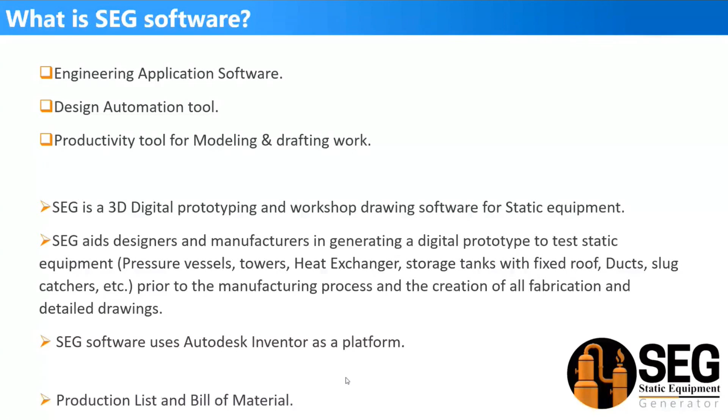You can generate the 3D model, fabrication drawings, a complete and detailed bill of material, sheet metal development, and many other things. SEG software is the only existing software that can generate vertical and horizontal pressure vessels, columns with different diameters and transitional sections with different thicknesses, storage tanks with fixed roof, shell and tube heat exchangers, equipment, piping, slug catcher, ducts, and spherical tanks. The only existing software that can do all of this under one umbrella.

By using another method, a pure CAD software like SolidWorks or Autodesk Inventor, we consumed around 25 hours to generate the 3D model, and around 10 hours to generate the fabrication drawings, totally around 35 or 38 hours to generate the complete 3D model and detailed drawings.

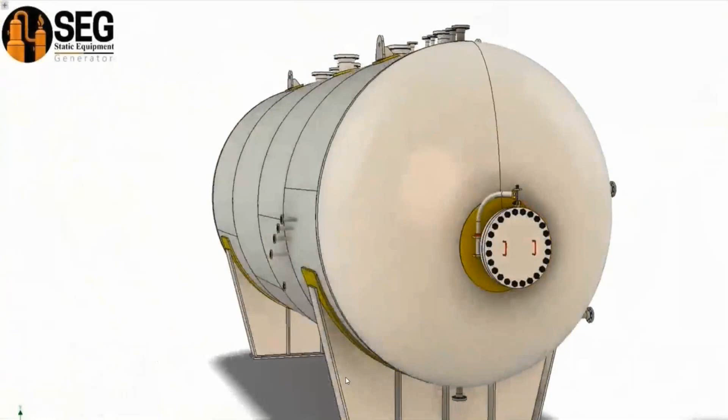By using SEG software, you can generate a 3D model and the detailed drawings. You can generate a complete and detailed bill of material. You can make the nozzle openings on the shell plates. You can get the sheet metal development for plates. You can export the 3D model in many different extensions. The same for the sheet metal development; you can export it in DXF or DWG extension. You can generate an estimated material cost report for your equipment to estimate the price of the materials required.

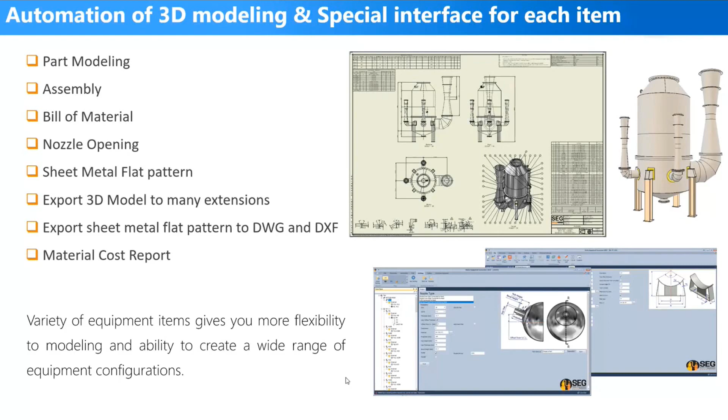Inshallah, in the next slides, we will discuss the available features for the storage tanks in SEG. Here we will not discuss the pressure vessels, columns or shell and tube heat exchangers. We will only discuss the available features for the storage tanks. In SEG software, we have a tool that gives you the ability to arrange the plates for the roof and bottom. And we will discuss the available features in this module during our presentation, inshallah.

By using SEG software, you will be able to generate different types and elements for the 3D model of the storage tank. You can add annular plates, bottom plates with different types, shell plates with different types, compression rings, anchor chairs, manways, cleanout doors according to the API, spiral stairs, drain sump, lifting lugs, and many other attachments.

For example, for the annular plate, you will find 3 different types. The first type is for equal annular plates, if you have a certain number of annular plates and they are identical. Another type, if you would like to define a separate thickness or a separate arc length for each annular plate, so you can control each annular plate separately. In that case, in SEG you can select the suitable type to define each annular plate separately.

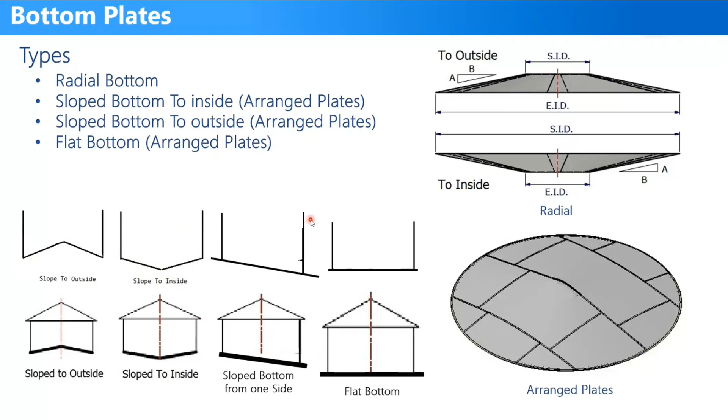Another option for the shell plates, like the same which we discussed on the annular plate. Here on the shell plates, SEG will give you the ability to select between 11 or more than 11 shell types. But for tanks, let's discuss 3 important types. The first type, which is shell from different pieces. Here, for this shell type, you can define the arc length for each plate inside the shell.

Most of us know that storage tanks are generated with diameters maybe more than 6 meters or something like that. So one sheet will not be enough to generate the complete shell course for this tank. So we need more than one plate to make the shell course. SEG gives you the ability to define the length of each plate separately. That's the first, but all of them with the same thickness.

Another type, which is shell from different pieces and thicknesses. This type will give you the ability to control the thickness of each plate on the shell. As we discussed, for the clean-out door, you may need to increase the thickness of the shell in this area. So you can make one sheet on this course with a different thickness for the clean-out door. So this type will give you the ability to control the arc length and the thickness for each plate. Okay.

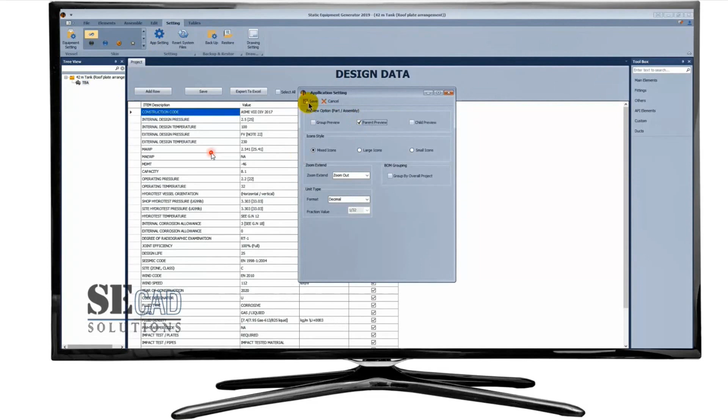Here in this video, we will generate a roof for a storage tank with 42 meters diameter. Okay, so from here, we will define the delivered plate dimensions. Okay, and we will add an arranged roof. And from here, we will define the top inside diameter and the thickness of the roof, the slope of the roof, and the bottom inside diameter.

From here, we will start arranging the roof plates, and in each row you will find an origin plate. This origin plate you can move to make it aligned to left, to right, or to center. You can control the offset of this origin plate. Many options you can do. The same for the rows. You can make them vertical and merge some rows, and that will give you flexibility to change the configuration of the plate arrangement. Okay, and we will discuss that inshallah during the demonstration.

Okay, after creating the arrangement, you can save it. After that, you can send the information to Autodesk Inventor to generate the 3D model. As you can see, the roof plate arrangements are created on Autodesk Inventor as separate parts.

Okay, so you can get a detail for each plate if you would like to make that, and get a detailed bill of material for this roof. Here, the plate arrangement, and for the bill of material, automatically you will get the details of plates and the weight of each plate.

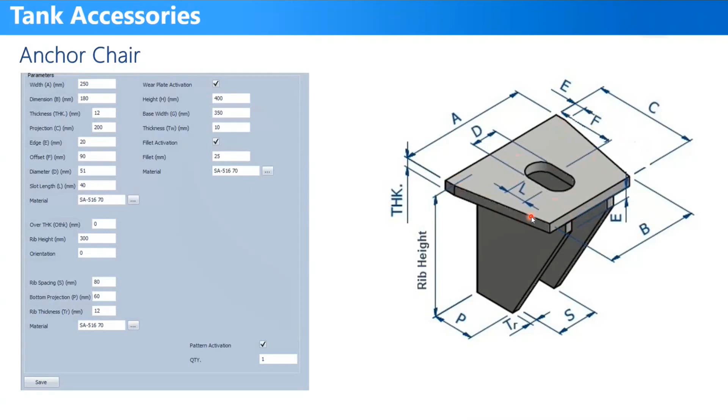Here for the cleanout doors, there are three different types of cover hinging. So you can select the suitable davit for the cleanout door. That's based on the size of the cleanout door. For the small sizes, you can use this type. For the mid sizes, you can use this type. For the large sizes, you can use this type of davit.

You can generate the spiral stairs for the storage tanks and multi-levels. Nozzles according to the API, so you can select the size of the nozzle as a nozzle from pipe or a nozzle from plate. So the neck of the nozzle can be generated from pipe or from plate. You can add a circular repad or a diamond repad. You can make it a low type as a circular or diamond repad.

And if you would like to control the dimensions of this nozzle, you can select the user-defined thicknesses, so you can control the dimensions to make it not equal the API dimensions. So here you will find the API dimensions appear here. So if you would like to change, just select user-defined thickness to change the thickness of elements.

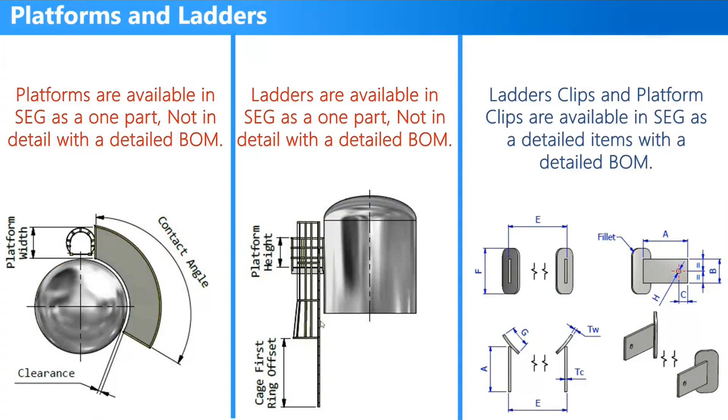You can make a nesting for the plates by using the Autodesk nesting tool, and that will give you the ability to save material because this tool will arrange the plates to give you the best cutting performance. Here in this video, we will make a nesting for the annular plates. So let's select the annular plates and generate a nesting study.

Okay. After that, we can define the available plate dimensions that we will use in nesting. Okay, the length and width for plates. After that, we will start the nesting study. Okay, here SEG will proceed to calculate the

required number of plates. If we come back here a little bit, you can see that the nesting efficiency is around 80%. So we will lose around 20% of the plates. And here the number of parts, we have 12 annular plates, and we will need 3 sheets for the annular plates. And you can see that's the arrangement of the annular plates for this assembly.

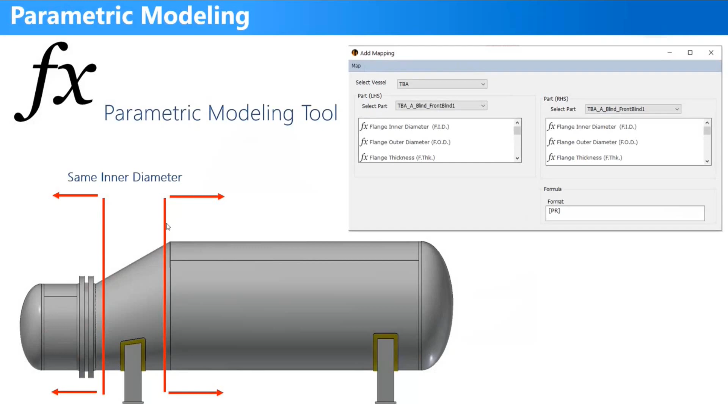Let's watch this video. Here we have two elements, shell and head. They have different inside diameters. By using the parameters relationship, we can make a mapping between the inside diameter of the head, and from the right hand side we select the shell and select the inside diameter of the shell, and make a relationship between them, so both of the inside diameters will be equal.

In case of changing one of them, let's change one of those inside diameters to 1.5 meters, for example, and click save. If you select the second item, automatically the inside diameter for the second item will be changed.

Let's repeat it for the thickness. Let's make a mapping for the thickness. Select the thickness of the head and the thickness of the shell, and make them equal. So in case of changing one of them, it will be reflected to the other. Click save. Now if you open the left head, you will get the inside diameter of the head changed.

So you can make a relationship between the connected items, okay, like that figure.

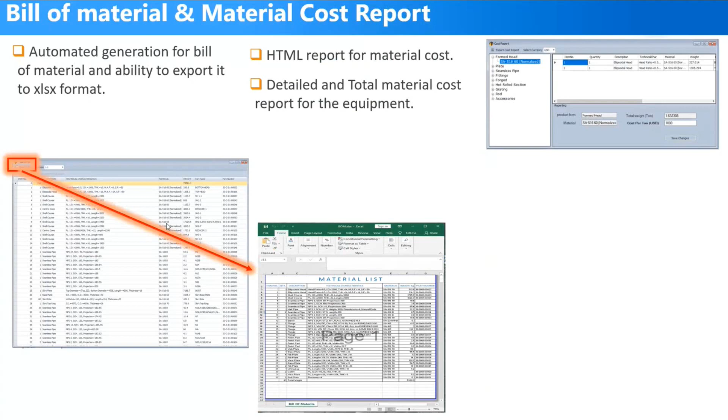You can export your bill of material. You will generate a detailed bill of material for your equipment, and you can export this bill of material in Excel format. So if any other department in your company, some of your colleagues, needs a bill of material in Excel format, you can send it to him to proceed with another process.

You can generate an estimated material cost report for your equipment. You can generate a nozzle opening by using a tool for this, used to generate the nozzle opening on the shell, and that will give you the ability to get the sheet metal development with the nozzle opening.

You can get sheet metal development for all plates in your project by using the flat pattern tool in SEG software.

You can export the 3D model in many different extensions to many different CAD software like CATIA, Pro Engineer, SolidWorks, AutoCAD, and many other applications.

You can export the sheet metal development to DWG extension and DXF extension. You can export your drawings to many different extensions.

For the drawings, you can make a general arrangement drawing for the equipment, make sub-assembly drawings for the attachments, and make detailed drawings for some nozzles or other attachments.

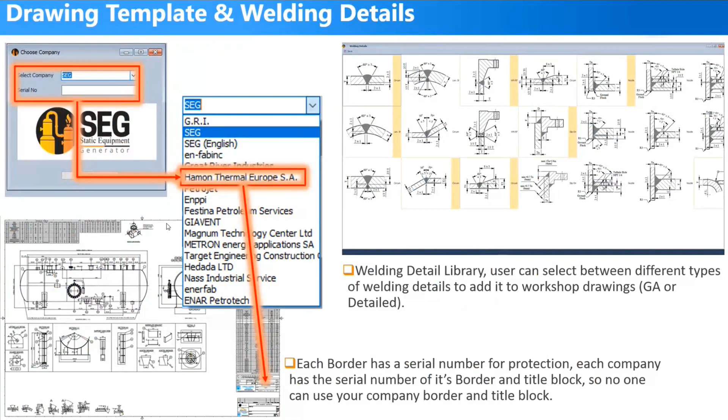Some of the available types of nozzles on shell: SEG includes more than 23 types of nozzles. Some of the famous types, like nozzle from pipe, where the neck of the nozzle will be formed or fabricated from pipe. Nozzle from plate, where the neck of this nozzle will be fabricated from a plate. Long weld neck nozzles, self-reinforcement long weld neck nozzles, forged hubs, forged hub with lips, rectangular opening, oval opening, and many other types of nozzles.

Some other types of supports available in SEG software. For example, for vessels and towers, you can use saddles, stacked saddles, tilted saddles for tilted vessels, skirt, support legs, lugs for vertical vessels, anchor chair for storage tanks, and support legs from standard hot rolled sections.

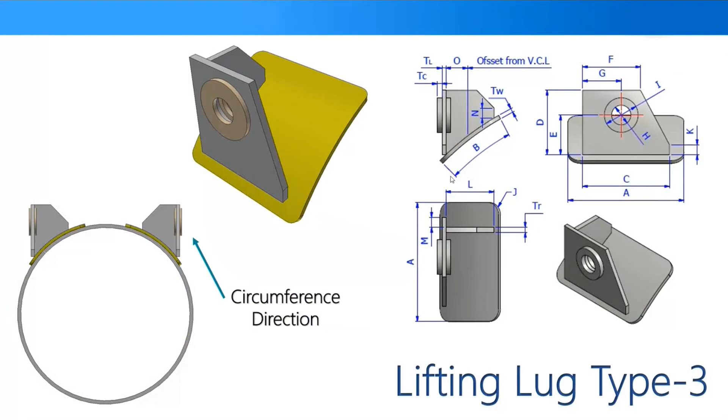Some other types of cradles for small vessels. Many different types of lifting lugs available in SEG suite for different positions of the vessel, like horizontal vessels, vertical vessels, small sizes, large sizes, like trunnion, and here different types of trunnion, different types of lifting lugs. Here are some other details for each type of lifting lugs. It's actually usable for vessels in most options.

Okay, now let's start generating our demo of today. Here's SEG software, and we will generate a new project. So from here, let's generate a new project.

That's the name of the project, demo, with today's date. Let's select the project location. So let's select the desktop, and from here you can select the module of the project. In our case, we can select the tank module. That module will give us the ability to make roof and bottom plates.

In case of using the overall module, it gives you the ability to generate tube sheets for heat exchangers. You can make spherical tank parts, piping, or ducts. So the overall module gives you all the features of the other modules. In our case, let's select the tank module, and by clicking on finish...

SEG will generate a project folder. This project here, you can figure that that's the SEG tree. The SEG tree includes different levels. The first level is the project level, where you can define the project information like project number, plant number, client, manufacturer, all of that.

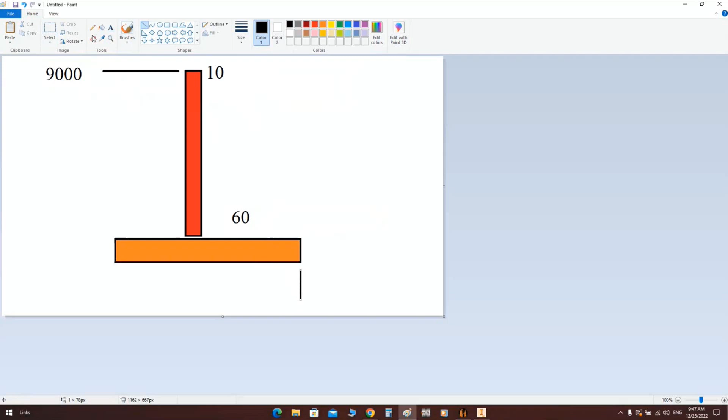And here we have the bottom plate, let's make it like that and change the color here. So we have 10 millimeters thickness here for the bottom plate. For the shell plate, we have 10 millimeters thickness, and here 60 millimeters projection for the bottom plate. So totally, the outside diameter of this bottom plate will be that value plus double that value and double that value, which is equal to 9140.

So let's repeat it here. Yeah, it's correct, 20 plus... so that's the outside diameter of the bottom.

Okay, so from here let's add the first part, which is flat bottom. You can figure that there are different types: sloped bottom. If we open the presentation again, for the available types for the bottom, you can figure that you can make it a flat bottom, tilted bottom, sloped to inside, or sloped to outside. In SEG, if you open the element API elements, you will find arranged sloped bottom with those three types: tilted, sloped to inside, and sloped to outside. In this case, let's add a flat bottom.

And for the bottom here, when you select this item, this form will appear, and we can define the bottom plate dimensions: the thickness of the bottom, the overlap, and the diameter of the bottom plate.

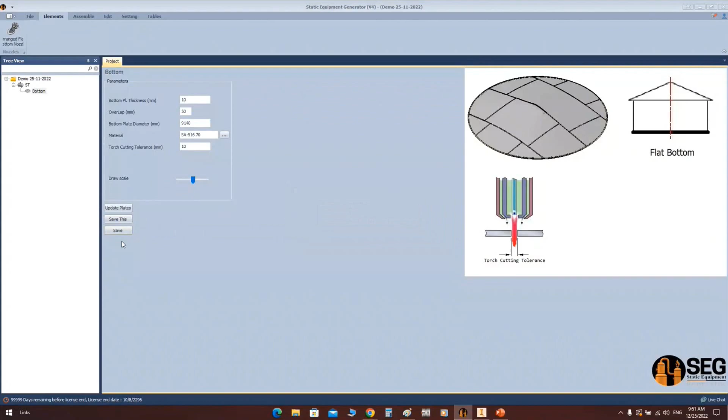Now let's select the scale of the next drawing, save this, and open the update. Here we have the plate, the bottom outside diameter, and on the next step we will make the arrangement of plates. Here you will find some options at the beginning before proceeding with plate arrangement, which will give you the ability to change the general configuration before going in deep.

Here, for example, let's select mid row - that means we will get a mid row here. Let's get a new one. If we have a plate like that, you can make a mid row here on the middle, so you will have a mid plate on the center of the roof. If you click on row, you will get a plate like that. Let's remove this one here.

I need to check the setting - sorry, we didn't save this value. Just one. Let's save that, come back here and open the plates. Change the scale - you can figure that if you open that, the scale is small. If you change that and click save, you can increase the scale. So if you click the mid row and row plates, you will get this configuration for the bottom.

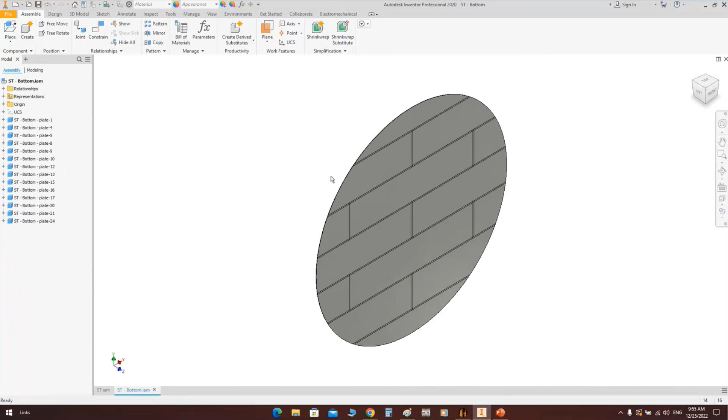But if you would like to make a rendering for elements during creation, we will select an option that gives us the ability to render the items during creation. Here we have the 3D model of the bottom, and if you take a look, you have the assembly from different parts. If we open that assembly, you can figure that you have the first element here - that's the first plate as a separate plate, then another plate. So each part is created separately, and you can make a nesting or a detail for that one.

Let's select the option of rendering elements during creation. From setting and app setting, let's select child preview and parent preview, and click save. And from here, let's select a shell element. Let's add panel.

Now you have generated the bottom plate model in Autodesk Inventor. Now we see the whole bottom plate with all the bottom plates, sketch plates, full plates. Okay, and now how easily can I generate the detailed drawing? In the detailed drawing, each part will be marked with a mark number and give the details of the length, width. Is that also a simple method, like how you generated this bottom plate?

Okay, we will discuss that during the demonstration, inshallah. After generating the 3D model, we will proceed by making a detailed drawing for the bottom, a general arrangement drawing, and how we can import the bill of material for each element. We will make a separate drawing for the bottom with a detailed bill of material in the drawing, and how we can reflect the item number for each item on Autodesk Inventor. We will discuss that, inshallah, during the session.

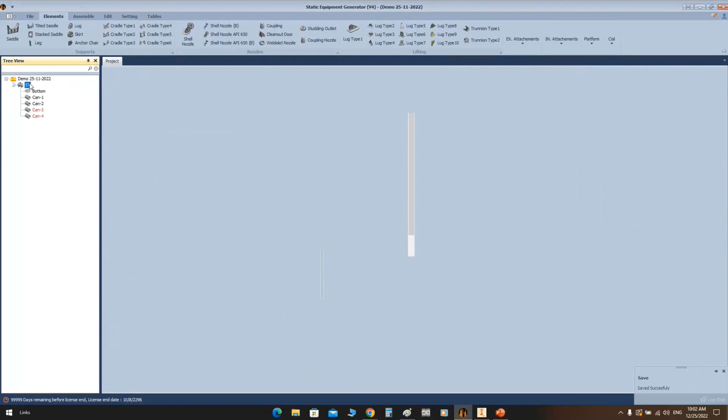Let's add another 2 shell courses, CAN 3, and let's make it look like CAN 1, another CAN, which is CAN 4. It looks like CAN 2, and click on save. And for CAN 3, let's change the thickness. Let's make it 8 millimeters and click update, click save. And for that one, we will keep everything as it is. Now let's start the assembly.

The third CAN, the last CAN.

Okay, now let's add a compression ring. So from here, let's select the equipment, and from elements, let's select the compression ring. Here from the compression ring, let's select detail B. You will find different types of details, based on the API. So let's select detail B, and from here, let's define the bend diameter.

So let's check that here. If that's the top can, we have inside diameter here and 8 millimeter thickness. So the bend radius here, which is that line, will be, so that's the bend radius of the angle. So from here, let's define the bend radius, and the offset of this angle here, the offset from the facing of the angle from the end of the shell.

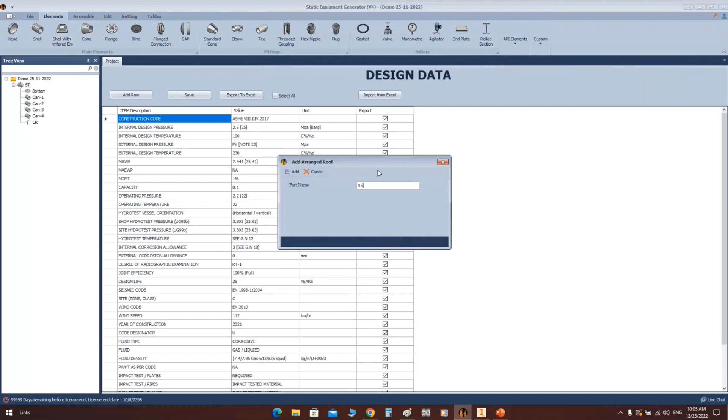Now let's generate the roof. From here and from elements, let's select arranged roof. Okay. And for the roof, let's define the opening here. Define the thickness of the roof to be 8 millimeters, the slope of the roof 1.5, the overlap and the end inside diameter. Okay, here we have an equal angle, like that.

Okay. And the roof will be here like that. So the offset from that line, so let's select another line with another color. So the diameter here, let's say we have 40 millimeters on each side. So that value will be increased by 80 millimeters. Okay, so the inside diameter, or the diameter of the roof, will be like that. And that's the torch cut tolerance. Change the scale and click on save.

Now let's open the plate arrangement for the roof. And from here, let's click draw plates. So we will get this arrangement as a default. You can change the plate arrangement if you would like. And here we will discuss another option. Let's reset the grid. Let's make all centered.

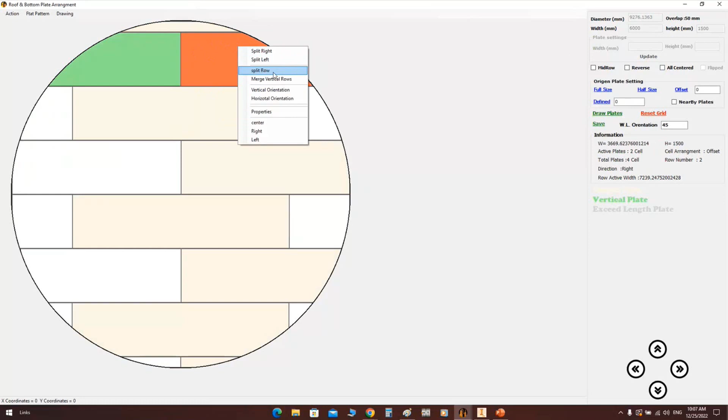So we merge those rows, and from here we can change the origin plate. As you can see, the origin plate takes orange or brown color. So let's make it on the right like that, and make a split to the right. So we will get two plates here, and make another split here. So we have 4 plates. So we can define each plate width here.

So let's define the width of the origin plate to 1.5 meters, like that, and the same for that one, 1.5 meters. So we have those other plates here like that. The same thing we will do here.

Let's flip the orientation of those rows to make them vertical, and let's merge those rows. And from here, let's make it half plate and define the width of this bottom plate like that. And you can add two other plates here and there, and define that one to be 1.5 meters and that one 1.8. So you can control the arrangement of plates that way.

You can make an offset. For example, let's make it offset by half a meter. So you can make the welding line offset like that, and you can make it centered. You can make it full size, sorry.

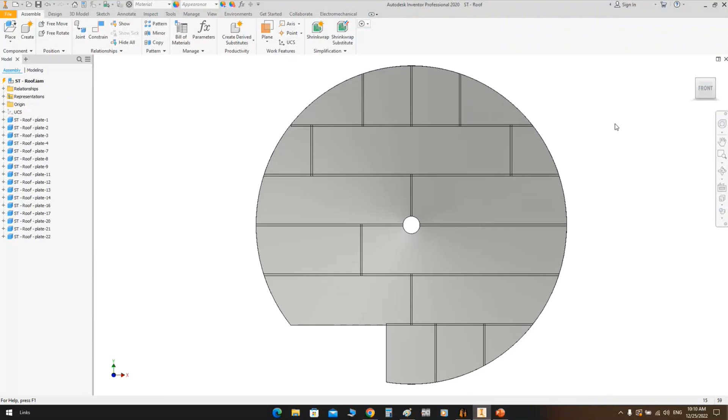Okay, now the assembly of the roof is done, and it will be automatically assembled with the tank assembly. Here we have the tank, bottom, shell courses, and roof.

Now let's add some attachments here. Let's add a cover for the roof. So from here, let's define the thickness of the plate, the overlap, and the length. Let's add a cover, top cover plate, millimeters. The longitudinal welding line orientation, let's make it 45. Save, and click on Start Assembly.

Now, after generating this item, we will make the anchor chair, make a cleanout door and some other nozzles, make a spiral stair, a platform with ladder, and some nozzles with internal piping and external piping.

Okay, from here, let's select the first can. We will add anchor chair here. Okay, so let's select the first can. Okay, and from elements, let's add anchor chair. So from here, let's select.

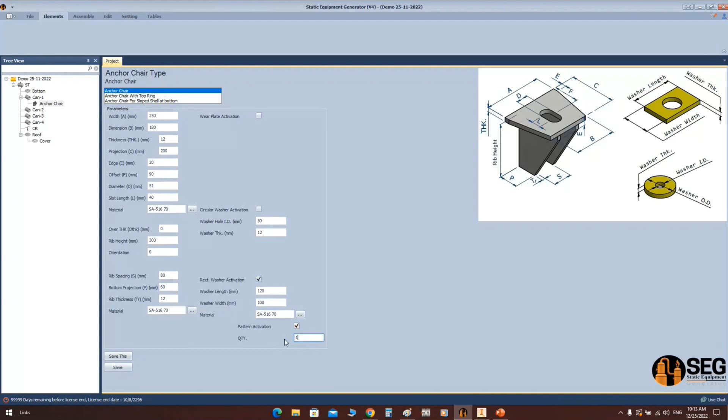And here for the orientation, let's calculate the orientation for 12 chairs, which will be 15 degrees. So let's add 15 degrees and click on Save. Now let's click Start to generate the anchor chairs.

Okay, here we have the front view and the welding line at 0 degrees, and here we have the anchor chairs. If we take a look at one of them like that, that's the anchor chair. Okay, now let's add a cleanout door.

So from here, let's select the first can, and from elements and from nozzles, let's select cleanout door. And if you select the cleanout door node from SEG, you will get this list. And each type of those has a different manway davit or cleanout door davit.

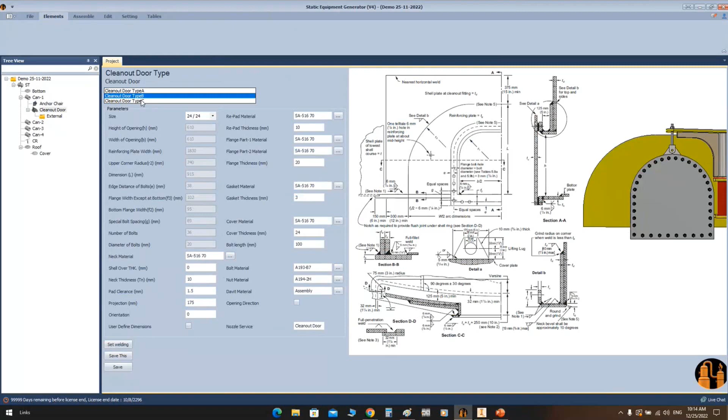Here for type A with small davit for small sizes. A cleanout door with that configuration. Another type of cleanout door. Those types which we discussed here. Okay, let's select type A. And from here you can select the size 8 by 16, 24 by 24. Let's select 24 by 24.

And if you would like to make a change to the API dimensions, you can select user-defined dimensions, and from here you will be able to change the dimensions of the API. But let's keep them as they are.

From here, if you have this cleanout door on a different shell course, okay, you have a shell with, let's say, a thickness greater than the other plates. So you will define the difference between the shell courses here in that value.

For the orientation, let's define the orientation as 30 degrees. Okay, and here's the materials, and let's click on save. And now let's click on start assembly to generate the cleanout door.

Here's the neck plate of the cleanout door. The repad, flange first part, flange second part, the gasket, the cover,

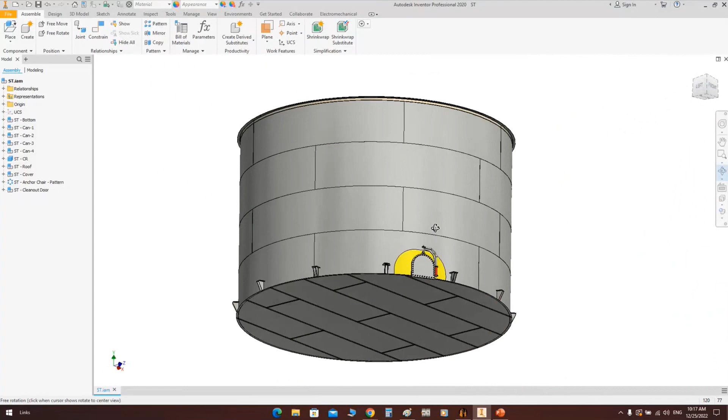Okay, now we have the cleanout door. Now let's add some other nozzles on this tank. Okay, so let's select the last can. And from here, let's select elements, and let's add another nozzle. Let's add nozzle 1. And for the nozzle 1, let's select a nozzle from pipe.

You can figure that you have a large list of nozzles with the different types, as we discussed in this slide. You will find a nozzle from pipe, nozzle from plate, long weld neck nozzle, more than 23 types of nozzles. Let's add a nozzle from plate and select the size as 10 inches. Sorry, this nozzle is according to ASME.

So let's delete it and add another nozzle according to the API. So you will be able to add a diamond pad and circular pad. So from here, let's add a shell nozzle according to API. So that's one. From here, let's select nozzle from pipe, select the size and select diamond pad. And from here, let's select the schedule of this pipe and define the location. Define the orientation.

And for the projection from the outside diameter of the vessel, let's define that after adding a flange. So let's add a flange here. Okay. And select welding neck raised face according to ASME B16.5. Rating, let's keep it 150. Select the size of the flange and the same schedule of the pipe.

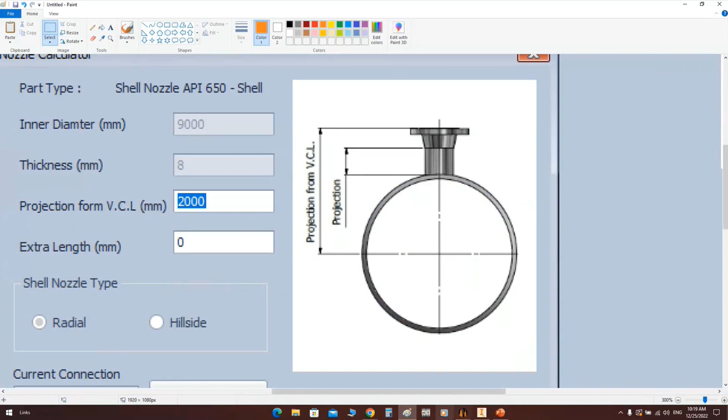Okay. And if we come back to the nozzle again, from the calculator, you can calculate the projection of the nozzle. If you take a look at the image here, by defining the projection from the tank center line to the facing of the flange, SEG automatically will calculate the required projection of the pipe. So let's make a new page.

Some points here. We have this circle, which is the diameter of the tank, and that's the center line. And we need to make a nozzle projection here. So the outside diameter here will be divided by 2. So that's the outside radius at that point. And we need to make a projection over that value with, let's say, 200 millimeters.

Okay. So the projection from center line, if we calculate it, that's the projection to the facing of the flange. So let's make it 4 meters 750. So if we come back here, 4 meters 750, and click calculate. So SEG will calculate automatically the projection of the pipe here, which is 140, and it will be reflected to the projection on that form here.

Another option for the set weld, here SEG detected that you have a repad and a pipe. So you have an option here to select a single V weld or a double V weld. So let's select a single V, and you can add a clad on the parent element or parent and nozzle, or you can make it without clad.

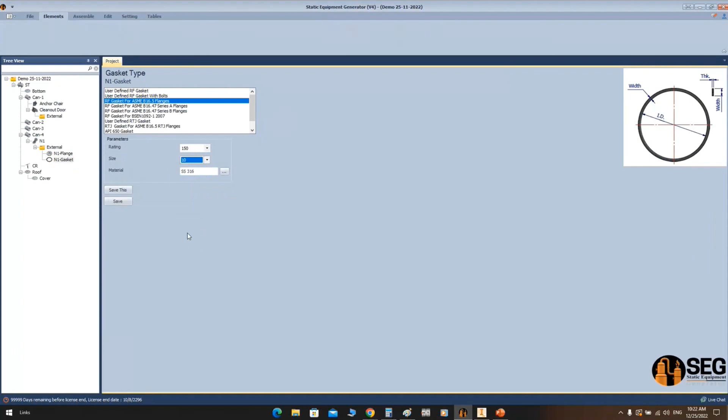Okay, so to make a piping from the external connection of this nozzle, let's add some other items after this flange. So from here, let's add N1. Okay, so let's select according to ASME, select the size of the gasket. Let's add another flange. And let's make it look like N1 flange, but we will flip the facing of this flange, like that.

Let's add a pipe, N1, and define the size of this pipe to be 10 inches with schedule 40, with a length of, let's say, 1 meter and 50 millimeters right now, and click save. Let's add an elbow, N1 elbow, like that. Let's make it a long radius elbow, 10 inches. Select schedule 40, and click on save. Now let's create those items. They will be connected to this flange.

So if you take a look here, after finishing I will show you that. We have connected piping to this nozzle here like that. We have another flange connected here, another pipe and elbow. And if you would like to flip the orientation of this elbow to make the connected pipe go below, we can change the orientation of this elbow, make it 180 degrees, and let's add another pipe, N1 2, make it look like N1 pipe 1, and let's change the length.

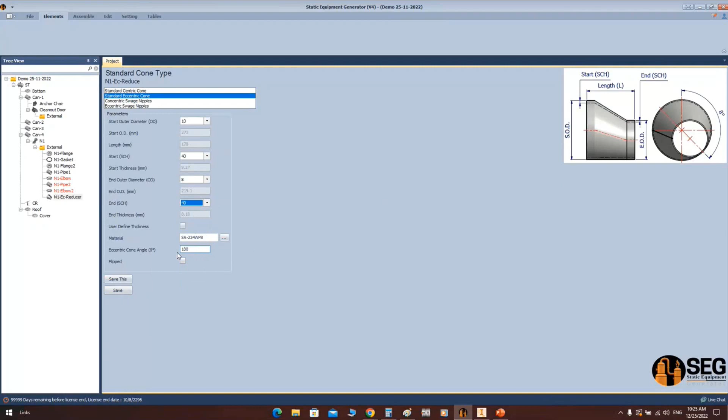Okay. And let's add another elbow, and make the orientation at 0. And let's add a reducer, N1 reducer. And from here, let's select eccentric reducer, select the size which is 10 inches with schedule 40, and it will be 10 by 8, and the schedule here will be 40, and the eccentric cone angle will be 180 degrees, and click on save.

Now let's click on start assembly. So the first thing, the elbow orientation will be changed. Okay, so you can figure that it comes below. We have a pipe, another elbow. After that, we have the eccentric reducer.

Okay, so you have an external piping connection here on this nozzle. Now let's add another nozzle to the roof with internal projection. So here we discussed the nozzles with external projection and how we can make a piping for the external projection.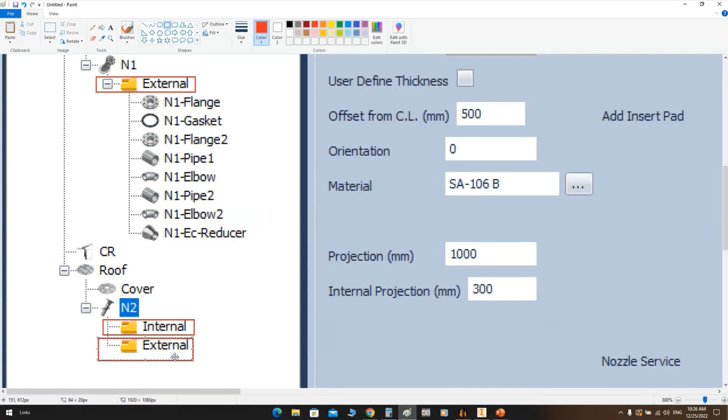Now let's select the roof, and from elements, let's add a nozzle with internal projection and external projection. So let's add N2. You can figure that in N2 you have internal connection and external connection. For N1 we have external connection only, but for N2 we have internal and external connection. That type of nozzle gives you the ability to make internal piping and external piping. You can connect elements to the inlet of the nozzle and outlet of the nozzle.

So from here, let's select the size of this nozzle, make it a 4 inch nozzle with schedule 40, and add a repad, offset from vessel center line, and the orientation 190 degrees, and the projection from the weld line here. So let's make it millimeters, and the internal projection, let's make it half a meter.

Click on save, and for the external, let's add a flange, flange 1, and let's make it a slip-on flange according to ASME. Select the same size of the pipe, the offset of the nozzle from the pipe, and click on save. Now for the internal, let's select the internal node, and from here let's add another flange, flange 2, and make it slip-on, 4 inches, millimeters.

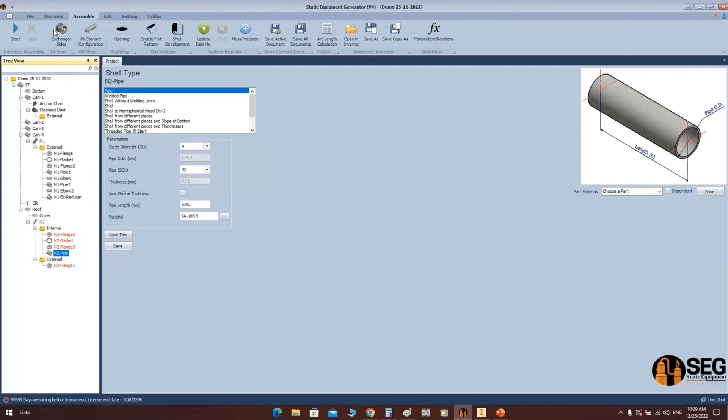5 meters, click save. And let's take a half section here on the tank like that to check the nozzle during creation. Okay, so let's click on Start Assembly. Here the roof nozzle will be generated with a repad.

Okay, so you can figure that this nozzle has internal and external projection. Now we have this nozzle with internal projection like that. We have 2 slip-on flanges here and a connection point at the end here. If you would like to make another piping here to another place, you can make it the same way we did minutes ago for this nozzle.

Now let's add a spiral stair on this storage tank. So from here, let's select can 1, and from elements, let's select external attachment. You can figure that you have a large list of external attachments like a nameplate, external repads, top davit for columns, grounding lugs, earthing bosses, fireproofing clips, external stiffening, nozzle ribs, many other attachments here. One of them is the spiral stair.

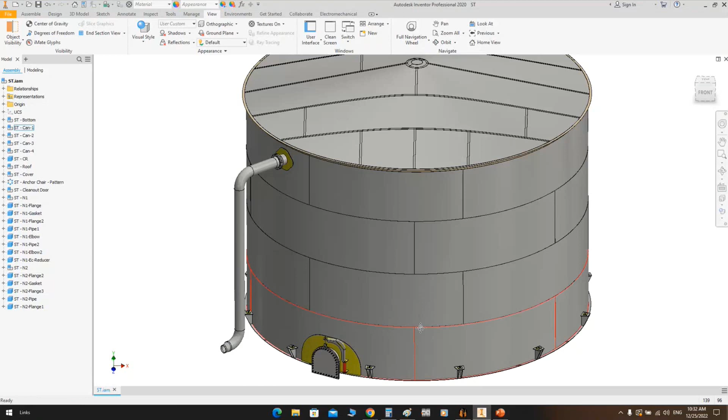The offset from the base, keep it at 0, stair inside width, which is the spacing between the internal stringer and the external stringer. The stair direction, we will make it counterclockwise. So if you take a look here, the stair will start at 0. If you take a look from the top here, if you would like to make it in that direction, let's make a print screen here.

If you would like to make the stair start in that direction, that's clockwise, but in our case we will make it on the other direction, counterclockwise. So from here we will define it as counterclockwise, and here the step width, the step thickness, the step rise, and the channel size.

We will keep all dimensions as default. Here we will make a cut on the rails at the end of the stair, so we will cut the rails to the first post. It's not connected to another platform, so you will not select that one. Select this checkbox as a closed platform end.

From here you can select the size of the post on the platform, define the number of posts on the spiral stair, 6 posts and 2 posts for that one, platform angle 12 degrees, and here for the rails dimensions, all of that.

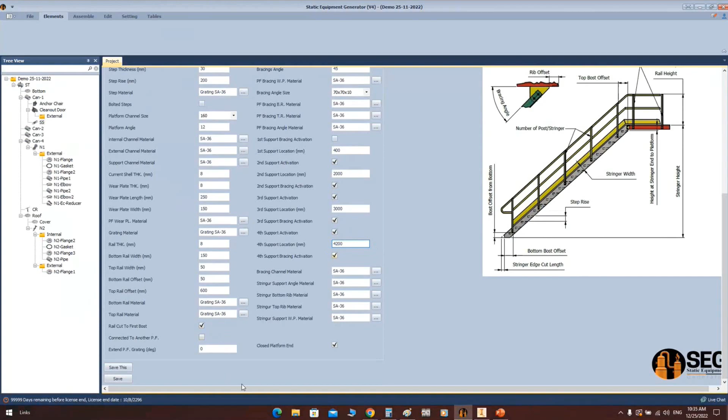Let's make it like that, and let's add the last one like that, and let's click on save. Okay, I think that's okay, and click on save.

Now we fill the dimensions of the spiral stair, and now we will start creating that element. You can see that each element will be generated and assembled on the spiral stair assembly.

This model includes around, I think, more than 30 elements, so it will take some time to generate it, around a minute and a half or 2 minutes to generate the complete 3D model for the spiral stair.

Here's the steps and the platform.

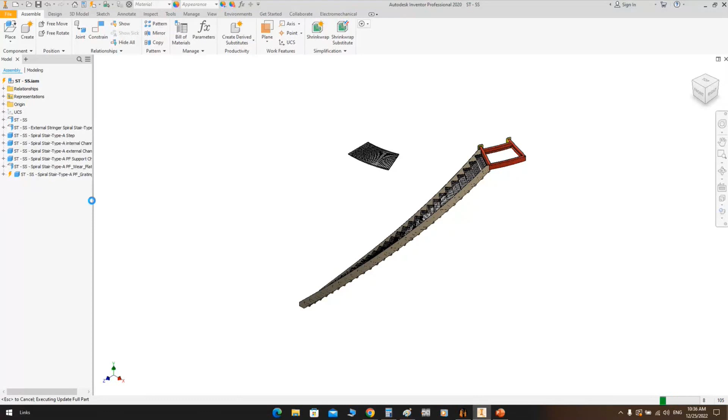Mr. Ahmed, till this moment, I would say - can you hear me? What, can you hear me?

Yes, I was saying that the demo till this moment, my one word would be that it's very impressive. Alhamdulillah, the work that you have done is amazing. Till the shell development was okay, but now you have a spiral stair also, so for me it's really amazing.

I just want to ask you, how long have you been working on this software, and how you came up with this idea of creating a 3D software for the static equipment?

Since starting on working on this field in 2008, I found there is a problem in generating the drawings of the equipment, and each time you will repeat drawing again. I started with AutoCAD, which is a traditional way for drawing. For example, when I start making an ellipsoidal head, I found each time I repeat the same orders, repeat the same sketch for the flange, all of that.

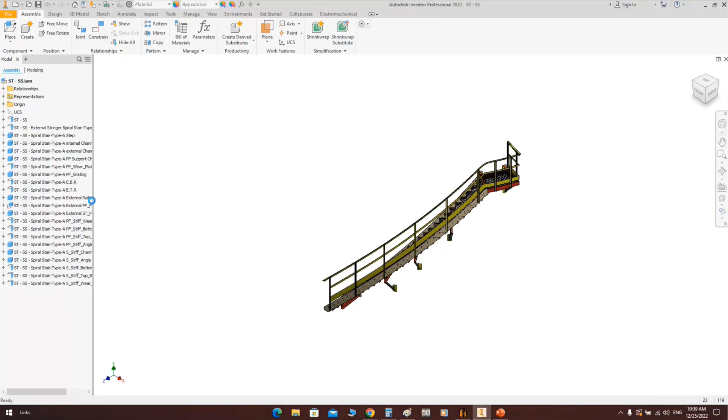After that, I made a lot of things using that method for heat exchangers, pressure vessels, but I found it's still difficult. In 2013, I dealt with iLogic, a tool in Autodesk Inventor that gives you the ability to make a macro and programming on Autodesk Inventor itself. So I started from this point and created the first application for me, which is 3DPV - that's the first application that I developed.

In 2016, I decided to prepare a team for a new application dealing with the Autodesk Inventor APIs directly, which is giving commands to Autodesk Inventor to generate the 3D model and drawings, making things more professional and easier. So from 2016, we started developing SEG software.

In March 2019, we developed the first release of SEG software. So the first release was March 2019.

It was including pressure vessels only. After 1 year, we included towers. Another year, we included storage tanks and heat exchangers. And after 6 months, we added ducts and spherical tanks. So now, alhamdulillah, we are covering many types of equipment.

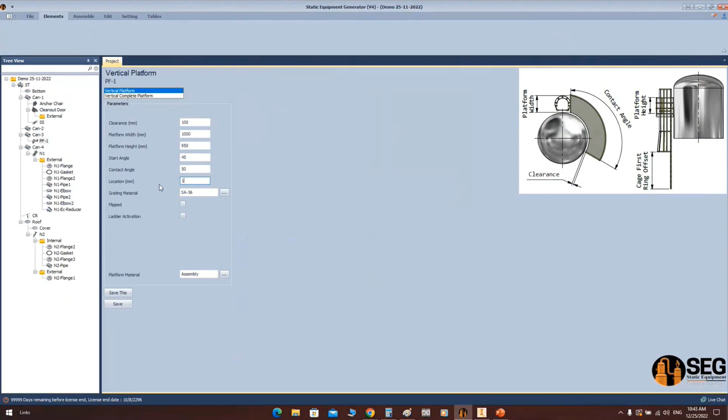The second type was a complete platform like that, but in our case we will not need that one, we will need the vertical platform. Let's define the clearance between the outside diameter of the shell, platform width, the height of the platform, and the start angle. Let's make it at 45 degrees. And the contact angle, let's make it 50 degrees, and the location, let's make it in millimeters, and let's click on save.

Okay, let's add a ladder and change the ladder height, and let's add a cage for this ladder and click on save. Now let's create the assembly.

Here you will find the location of this platform. After creation, you will find the location of this platform needs to be flipped, so the location of the stair needs to be on the other side. So how can we deal with that? By changing an option here and some parameters. You will get my point after creating the 3D model.

Here you can figure that the access of this platform may not be good. If you would like to flip the location of this stair to be on the other side, we can change the start angle here to make it 95, and keep the contact angle as it is. Here you can select the flipped option to make the platform start from that angle up to that angle, so the location of the ladder will be on that side. Okay, let's save that and click on it.

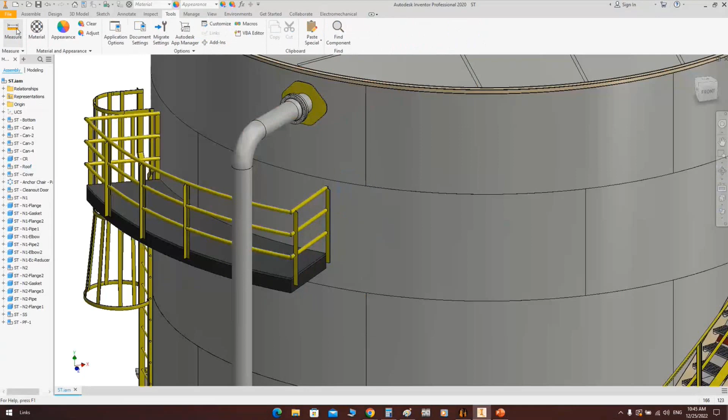So you can figure that the axis of the ladder will be here. If we measure the distance between the grating surface, from tools let's select the measure tool and measure from the grating top surface to the bed, it's greater than the man length, human length. So we can decrease this value by changing the location of the platform. Let's come back to the platform, and for the location, let's increase it by half a meter and start the assembly.

As discussed in the presentation for the ladders and platforms, let's come back here. The ladders and platforms are generated as a single part, so you will not get a detailed bill of material for it. You will get information that you have a ladder, but not a detailed bill of material for that ladder. You will get a part as a platform, but not detailed items for this platform.

So let's check the bill of material here. If we open the bill of material table here, let's check the ladder and platform. Here you have a ladder, and that's the length of the ladder, it's defined simply, not as detailed items for the ladder. The same for the platform, you have a platform, but not a detailed platform. You have a grating, that's the only item with the description.

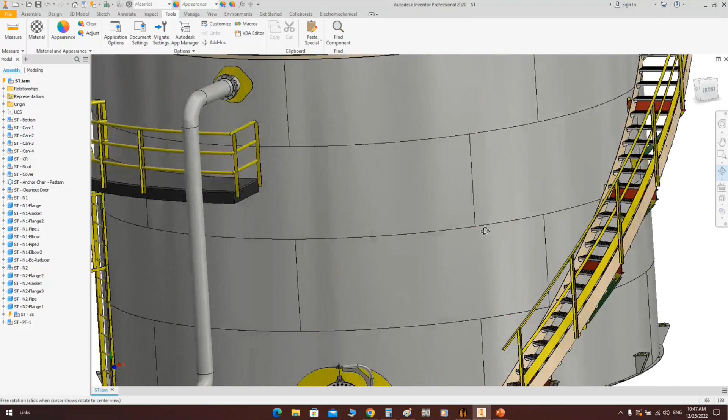Here on the stringer, you will have the stair treads with bolting, right? The connection will be bolting, so you will have development bolting details, like the dimensions of bolt to bolt. At that time, the option of bolts is not available yet, but we are planning to add many other things for the storage tanks and shop. But right now it's not available.

Okay, and you can make it if you would like to make it manually on the 3D model. On this 3D model, you can do it, but right now it's not automated.

Okay, here we have this platform, and let's add platform clips. As we discussed, for the platform clips or ladder clips, if you add it in SEG you can get it in detail. So let's add platform clips here. Let's select CAN 3, and from external attachments let's add a platform clips.

So you will find a huge list of different types of clips, and from here we can select the suitable type if you have a complete number of bracing like that. But in our case we need to define a certain number for the platform support. From here let's define the length, the UPN size, select the suitable size, the material of the UPN, and the location.

Bracing angle offset, which is dimension S at the beginning. Let's add a wear plate, so let's keep all dimensions as they are. If you would like to change the bracing angle size, the UPN size, click Save. After that let's click on Start simply to start creating the platform support.

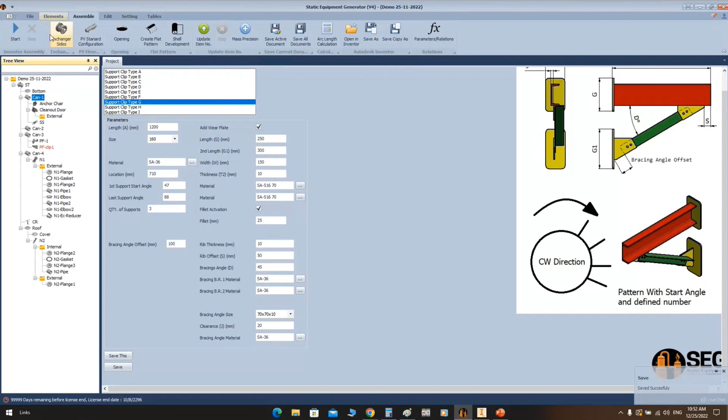Here for the nozzles, another group for nozzles, you will find the nozzles according to ASME with internal projection, another type with internal and external projection. Nozzles according to API with external projection, another type with internal and external projection, coupling, clean out door, weld outlets, stud outlets, and coupling nozzles. This type of coupling, you can make a connection to this coupling, but that one is in the coupling with a plug. But that one, you can make a piping and make another connection to this one.

Another group for the lifting, you will find different types of lifting lugs and trunnions here. Another group for the external attachments, you can add nameplates, top davit, and some other nozzle supports, platform supports, separate ladders, insulation, and spiral wing for the vertical and long vessels.

So I think you're saying that for each part we'll have to do individual nesting. For example, we will have to select the bottom plate and give the command to do the nesting. It will generate individually. Yes. Not one command for the whole tank where I say give me nesting? It's not possible. Well, it takes a huge time, and you may get some errors because this tool, I think, has some limitations. It's an Autodesk tool. It's very good for nesting, but to save time, it's better to make some items separately.

So for the roof, you can take the roof and make a nesting for the roof only. For the bottom, you can take the bottom only. And for the shell plates, I think it's easy. You have complete plates and half plates, so you can calculate it. You will not need a nesting.

But for repads and other attachments like a chair or something like that, if you would like to make a nesting, you can make a separate assembly for those items and make a nesting in one time. I will show you a sample for something like that.

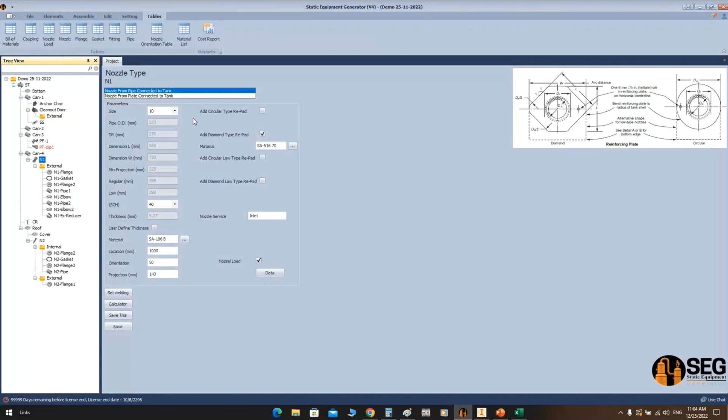The same if you have a blind, the facing of the blind, the projection of the nozzle, and the welding style. Here, that's the welding style. We defined it for nozzle N1, so you can define it here. Okay. Another table for flanges, if you have flanges, you have a separate table of flanges. Table for gaskets, table for fittings.

If you have like that, we have an eccentric reducer. We have 2 elbows, so you will have a list of fittings. You have a list of pipes in your model and a list of nozzle orientations. So each orientation for each nozzle will appear here, and a material list for the roof and the bottom plates, the seamless pipe materials, support plates and gaskets, flanges, all of that.

Okay. Now let's prepare the drawings from the assembly. If you would like to define your reference template, you can import it to SEG as a reference template. So if you have a template in IDW extension, you can import it, define the name of this template, and define the sizes as mentioned here on this image. After that, you can use this drawing as a reference drawing.

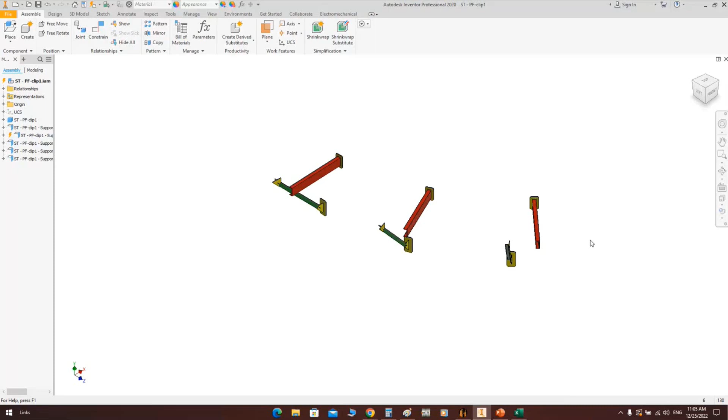Sorry. We didn't generate that. Okay. Now, after updating this one, let's generate the general arrangement drawing and a bottom detailed drawing for the bottom plates and how we can deal with that.

Mr. Ahmed, here just one thing. Yes. On the bottom plate, can we add a sump? Yes, inshallah. We will do it after the assembly. Yes, here I need to change that value. Sorry. Okay, so let's make it 27. It's okay. Okay, so let's select the bottom from here.

Okay, and from elements, you will be able to add a connection or a nozzle opening to this one. So from here, let's add a sump. And for this sump, you can select from different types: nozzle from pipe, nozzle from plate, long weld neck nozzle, forged hub nozzle. So in our case, let's select a nozzle from plate.

Okay, and let's define the outside diameter of this one as 600 millimeters. Can it be rectangular? A rectangular sump? No, for that case, it's a circular sump only, from pipe or from plate or as a forged.

So you have an option for sump, but it can be only circular. Circular, yes. If you would like to add another option for rectangular, our technical team offers that for free for our customers. If you have any request and if you would like to add new items to SEG, you can raise your request and our team can do that for free, inshallah. But we will need some information from you.

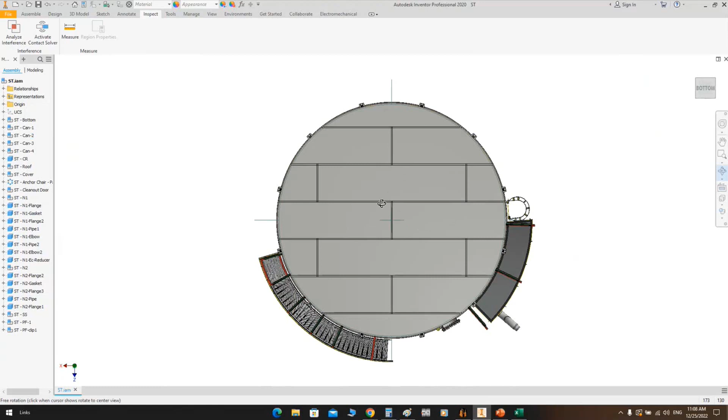Here, for this sump, if we take a look at the bottom, here, if we take a look at the top and flip this view. So we can add the sump on 90 degree or 180 degree, or with an offset, to avoid the welding line here. So let's change the selected thickness, the longitudinal welding line orientation, the gap, the offset from the center line, orientation, material, and here the projection, and make it sit in or sit on.

So let's make it sit in, and let's add a repad. Okay, so let's define repad and repad thickness, and let's click save. And from here, let's add an end plate to this one. So let's select end plate. From here, you can select between rectangular and, in our case, we will select a circular flat end without holes, and the outside diameter at 40 with a thickness of 3 millimeters, and let's click on save.

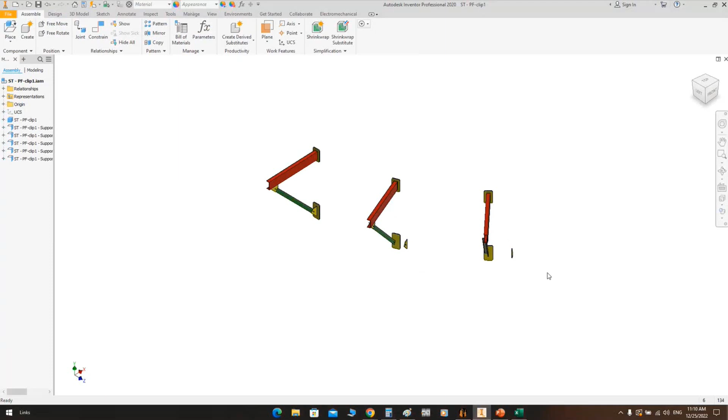Now let's start the assembly. So it's a flat plate with a reinforced repad. Okay, so we have here the sump on the bottom like that, and let's add a nozzle at 90 degrees, 2 inches, with an internal dip pipe to this sump. Okay, so from here, okay.

Ahmed, I think it's okay. We got that it's possible. So can we now proceed to the detailed drawing, please? So as to save time. Okay. Here, before proceeding with this, okay. Let's proceed with the drawings.

From here, you can select the equipment node from the SEG tree, and by clicking on it, right click. From here, you can select drawings and create a drawing for this equipment. You will get this dialog box, and from this dialog box, you can select from the first tab, which is sheet data. You can select the sheet size. Let's make it A1. Okay, and here the dimensions of the drawing.

You can change the location of the title block. It's by default on the right bottom, and you can make it landscape or portrait. Actually, 90% it's a landscape drawing. So from the active views, we will select the required number of views in our drawing. So let's select the elevation view. We will make one view, and the other view, which is the top view, we will create it and change its location by hand, or you can make a bottom view like that, or a top view like that. Select the required views from here and define the spacing.

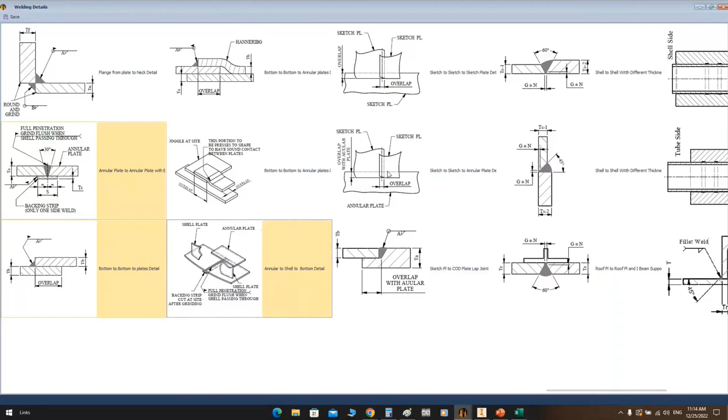Okay, clad nozzles. We have some attachments like that. And for here, let's add the detail for the overlap. And if we have an annular plate, you can add a detail like that. So let's add details like that. And from here, shell, the first shell course with the second shell. So let's add this one. And let's click on save.

Now, if you would like to add a client document list, like if you have mechanical data sheets that you received from the client, or other data sheets you received from the client or specs, you can add it like mechanical sheet and give it a number like that, so you can add it. Or if you would like to edit, you will get the data here and you can save it.

For the vessel document list, if you have some drawings like bottom plate, for example, bottom plate scale, like that, and give it a number, WG, like that, and add it. Shell plate development, like that, you can add your documents, mechanical calculation, all of that, you can add it in this list.

Okay, now for the title block for this drawing, it's a general arrangement drawing. And the drawing number, WG. And here's the revision table, so we can edit on this table. It's revision 0. The checker and prepared by. You can add some empty cells if you would like. And for the design style, here you will get an option for defining the required number of sheets per this drawing. Okay, I will show you an example for that.

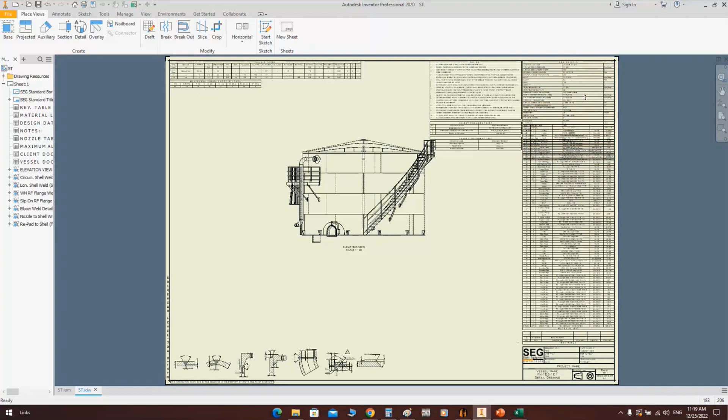As we discussed, if you have a huge number of details or information, you may need to separate some tables in another sheet. But I think for this tank, the design data table, we can decrease the values because it's not like pressure vessels. In pressure vessels, we need a lot of information for the design code, the maximum allowable working pressure, the seismic and wind code, testing of the material for shell, nozzle, all of that. But here we can make a modification to decrease the number of values in the design data, and we will reflect it again to the drawing. Here you can see that the welding details take place in the drawing. Okay.

Okay, now we're done. The location of this view, we may need to change it a little bit, change the X location. So if we take a print screen here and come back to the notepad. Screen. And here. So that's the location of the view. So we can define the location from here to there. So we need to change the Y location and the X location a little bit and increase the scale of this view.

As we discussed, let's come back to the drawing form again. All of the data are already stored. The check boxes on the tables, the revision table, all of that already saved. Here, let's minimize the location on the X direction a little bit. So we will decrease it by 5 centimeters. And for the Y direction, let's increase it, let's make it 25 and decrease the scale a little bit. Let's make it 32, for example, and let's update the drawing.

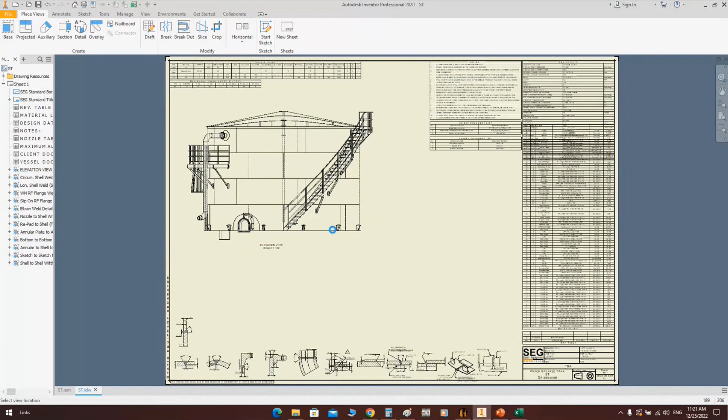Okay, now let's make a top view for this one. So that's the top view, and let's break the relation between it and the other view. Okay, and let's rotate it. Okay, like that. Change the scale. And move it to another place on the drawing, like that. So we have the top view here for this equipment.

And here you can add the orientation for nozzles. For example, if you would like to add a notation for the cleanout door, let's add a center line for this cleanout door. And from here, from balloons, let's select a nozzle tag. So if we select this one, select parts only. So we can get the balloon of this nozzle. So that one is a cleanout door.

And for this nozzle, let's add a balloon for this one. So that one is nozzle N1. Okay, and that one is nozzle N2 at the top. Okay, so let's add a center line here. So we have this center line for this top, and the location of the spiral stair starts at 0 and ends here. So you can define the elevation of nozzles, for example, like that.

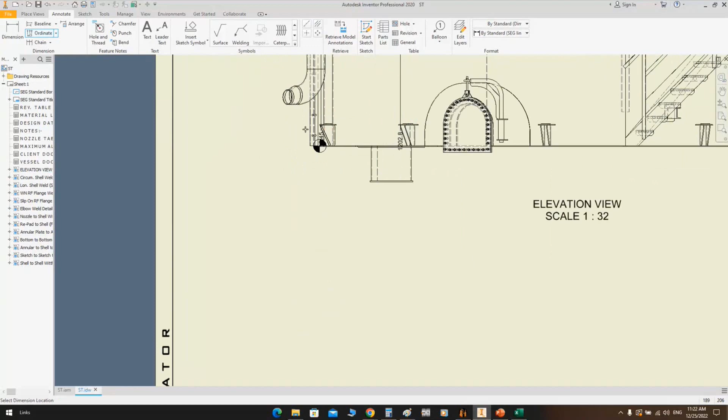So that's the location. Let's define the datum point, which will be the top of the base plate. And let's click continue. So that's the location of this nozzle. And if you would like to define the balloon of this one, let's select the balloon, and from here you will get the location and the balloon for this one.

You can define the length of plates. So that's the first course length, second, third one, and the last one.

Okay, and if you would like to add some other standard blocks like north orientation, you will find the list of standard blocks here for the welding and for other details. Here for the north direction, for example, you can add the north direction like that, or if you would like to add it with another sample like that, the north direction.

If you would like to rotate it, for example, like that, we need to rotate that one, so we will make an edit. So by double clicking on it, you can change the orientation of this one. So let's make it 45 degrees. So change the orientation of this one like that.

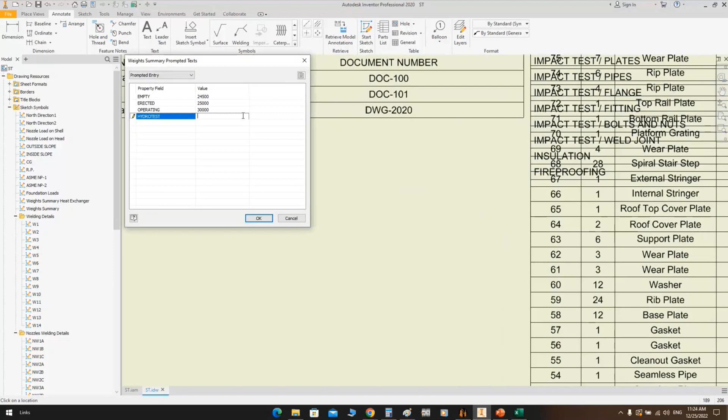And for the outside slope, to define the slope of this one, you can define the slope A and B. It's 1 to 5. Some other tables like the weights table, if you would like to define the weight, so the empty weight, let's make it 24.5 like that. The erection weight, operating weight, hydrotest weight, like that. So you can fill the weight summary.

You will find a lot of tables here like foundation load, so you can add a foundation load. If you would like to get the center of gravity for this one, from here let's select this assembly and get the actual center of gravity for this one. So by clicking on center of gravity, you will get the center of gravity here, this one.

And you can add this notation here. And if you would like to find the offset or the location from the datum line, so that's the CG, that's the center of gravity in case of empty. Okay, now you have that one.

For example, if you would like to edit one of those tables, like we need to modify the design data table, for example, and reflect that on the bill of material, and let's add another nozzle and reflect that on the nozzle table and the maximum allowable nozzle load.

Okay, so from here, let's go to the design data table, and let's select all and remove all checkboxes, and let's keep some data only here, not all data. Let's keep some of them and click save. Okay, now we have those items only. They will be exported to the drawing.

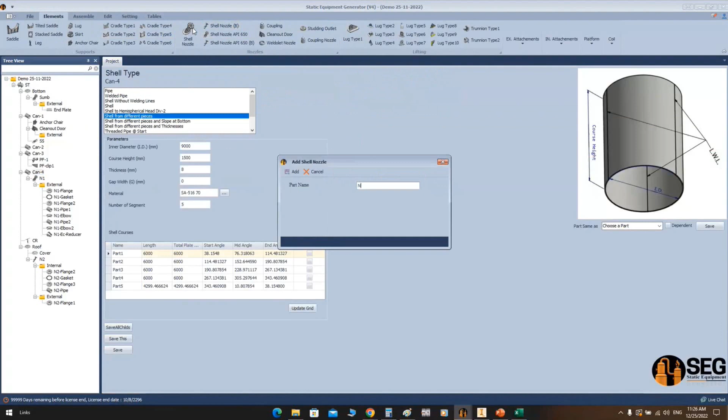And for can number 4, let's add another nozzle. So from here, let's add N. And this nozzle will be, let's make a manhole with a davit, for example. So from here, let's select a nozzle from pipe, select 24 inches with a repad, define the repad width,

and select the schedule, define the location, the orientation, and here that's the projection. Let's calculate it. It's a manway. And let's click on save. Let's add a flange here. So from here, let's add a flange in N3.

Okay, so we have this flange sized with 24 inches and schedule 40. And let's click on save.

Now you will find that we have 3 new items in the bill of material. We have a pipe for the nozzle neck, we have a repad, and we have a flange with 24 inches. Those are new items in the bill of material.

So if we open the bill of material here and take a look at the required number of items, it's 305. But on the drawing, let's move this design data out right now. You can find it's 302. So we have 3 different items increased.

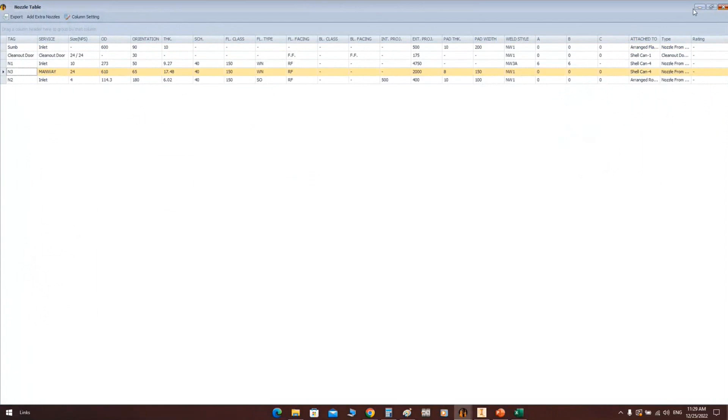This one. So if you check the nozzle table, you will find the nozzle N3 appear here, which is the manway, and for the nozzle load, you have a new nozzle which is N3.

So let's create the assembly for those elements. After that, we will check how we can reflect that to the drawing to update the bill of material, design data table, nozzle table, and the nozzle load table. So we have 4 tables we need to update.

Okay, here we have this nozzle. Yeah, just one thing. For the flange of the manway that you have made, it was like a standard flange. Can we put API 650 flanges?

Yes, okay. So from here, if we go to the flange of this nozzle, which is N3, you will find the list of standard flanges like long weld neck raised face flange, long weld neck with RTJ flange, slip-on threaded lap ASME, and if you come below here, you will find an API standard flange or a user-defined API standard flange. So you can select the suitable type for your case.

Here it's 24, and you can define the thickness. So let's make it 30 millimeters thickness for this one, and click on Save to update this flange.

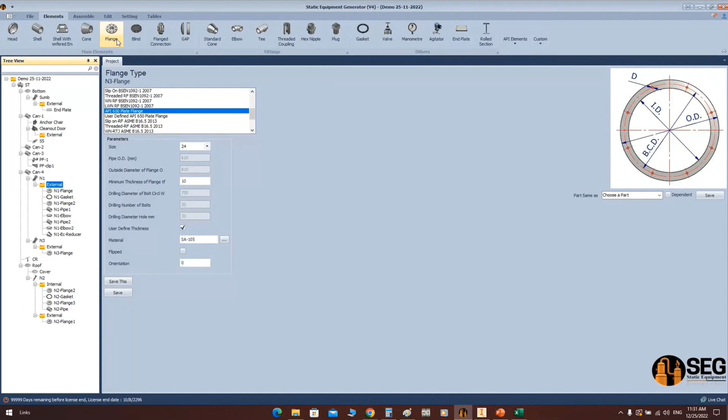So in user-defined flanges, a lot of options are available if you would like to define a flange from scratch. Okay, so here, after creating this flange like that,

let's update the bill of material and design data table. So from here, from drawings, let's select create drawing, and from tables annotation, let's keep the required tables only. We need to update the bill of material, design data, nozzle load, and maximum allowable nozzle load.

We need to select this checkbox, which is update tables automatically. If you select this checkbox, SEG will update the selected tables. So if you click on create drawing,

as we discussed, the location of the view will be changed because we changed it manually, that view. And you can see that the bill of material table, now it's updated.

All information inside it will be removed and refilled again. The same for the other tables, the other selected tables, which are the bill of material, design data, nozzle table, and the nozzle load.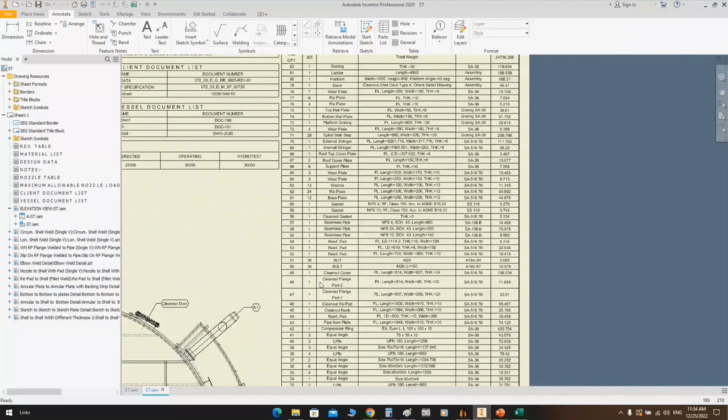Here, if you check the number of elements, you will get the same number here. For the item number of the flange, which was 26 here, that's 26, it's a flange, size 24, outside diameter according to API. Here's the material and weight of this item.

One more option: how to reflect the item number and balloon to the elements. If you select the item number and the balloon from here, you can see that this balloon is empty. If you would like to reflect the item number, let's open the bill of material to show you what I mean.

For example, for this shell course, it takes item number 18, and that one is 19 and 20. So to reflect this number to the bill of material or the drawing, you will need to make an update item number from the assembly tab.

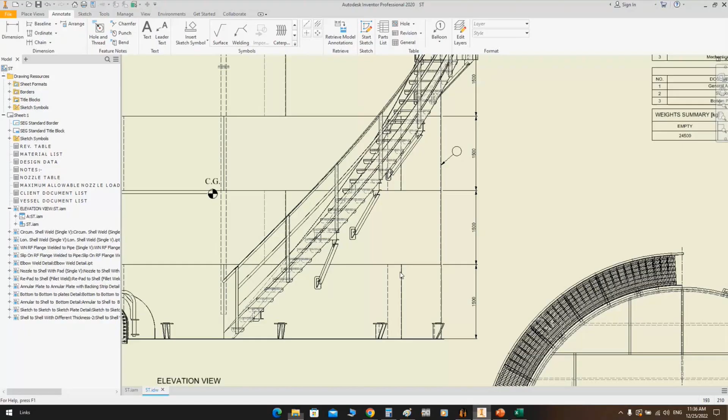Now let's create a detailed drawing for the bottom. So from the bottom plate, let's select it, then select drawing, and from here select create drawing. Select the drawing size - let's select A2 - and from active views, let's select one view.

We need a top view only, and from here let's check which view we will need to make a drawing for the bottom. So let's open the bottom, and from here let's select the front view - that will be the elevation view.

So from here let's select front and define the location and orientation, define the scale. Let's make the scale 50 right now - after that we can change it.

Let's remove all the checkboxes and add the bill of material. We will need a bill of material for the bottom only, and the revision table 0. Save. Let's add some other empty rows, and from here let's select our single sheet and click save.

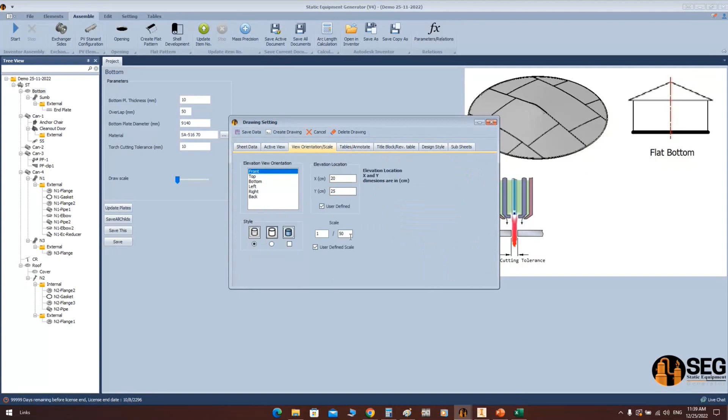Let's change the scale a little bit. So from here, let's come back to that one and edit the drawing. Here's the drawing, and from here let's change the scale - let's make it 42, and okay. So the scale of this drawing changed like that.

So if you would like to define the dimensions like that, you can do it easily - the width of each plate here. If you would like to add balloons, as we discussed, we will need to make an update item number.

If you would like to make it now, we can do it, but it will take around 5 minutes to generate. If you would like to wait until updating, during that we can discuss questions. What do you think?

We can skip this part of identifying. Can you show how you will generate each part detailing for this one, for this bottom?

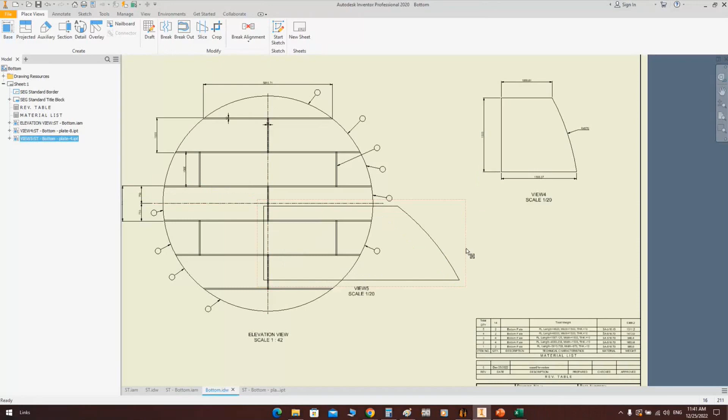Another one, let's add the top plate. Let's close this one, and from here let's open that one, for example. So if you would like to include it on the drawing, it will be like that. Let's move it here - let's move this view.

So in seconds you can get that, and you can add a balloon for the bill of material. Let's add an item number on the bill of material to identify that item. After updating the item number, you will get the correct item number here as per the drawing.

As you can see, here you have a separate bill of material for the bottom plate. You have all bottom plates here, with dimensions, materials, and weight, and here's the total weight of the bottom plates.

If these item numbers—can we do manual numbering in the table in the SEG software, so that we have some unique kind of numbering? The manual numbering doesn't match with SEG criteria.

In SEG software, if you have two or more identical items, like they have the same description, the same technical characteristics, the same material, the same weight, they are identical. Like flanges—if you have a 4 inch flange with rating 150, the same schedule, the same material, all of that, SEG will detect that they are identical, and SEG will give them the same item number.

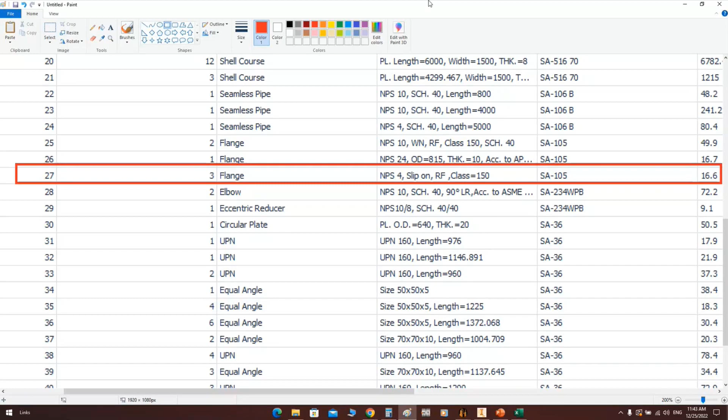After exporting this Excel sheet, you will get an exported Excel sheet like this one. As we discussed, you can change the numbering of items here. After changing the numbering, you can import this table inside your drawing again.

Let's take an instance from that table. Let's close this one, and let's remove those columns—delete those and delete some items from here to there.

Mr. Ahmed, we cannot see your screen. Okay, now we can see. Yes.

So let's change the numbering, like 100, and let's change the numbering. Okay, now we have a new bill of material.

If you'd like to import this one to your drawing, from here you can import a table, a general table, and you can make a link between it and another table, like a copy from that one.

So the started data will start from A1, and you can import this table to your drawing. After that, you can change the width of each cell, all of that.

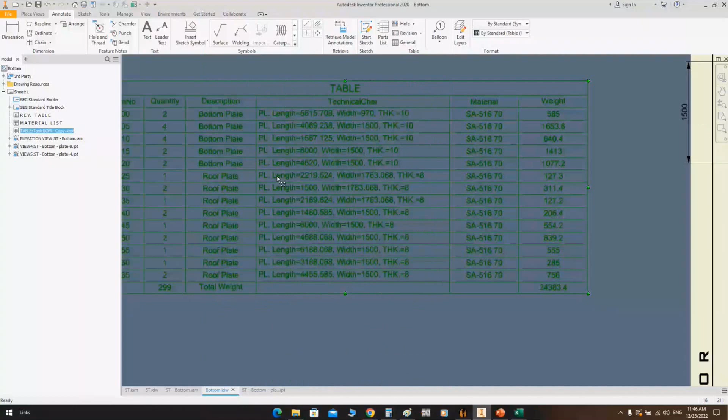Click Save. Now you can import a table from Excel, and now you can edit it on the external Excel sheet. By that way, you can make your numbering.

After that, if you would like to reflect this number to the item, you can do that from modifying the title of this one. For example, this item is 105, so you can fill this value here, and if you come back to the drawing, you will find this value reflected to the bill of material.

Okay, Mr. Ahmed, we got it. Any other questions? I think it should. Sorry?

Any questions? There's like, for example, now this is a revision A drawing. Okay, now we made some changes in the drawing, and the first part was split into two.

Okay, the bottom portion that you are seeing was split into two parts. Okay, so that part number shall change, but it should not affect the other part mark numbering, right? It will change the part numbering, because here in SEG we base it on the group number.

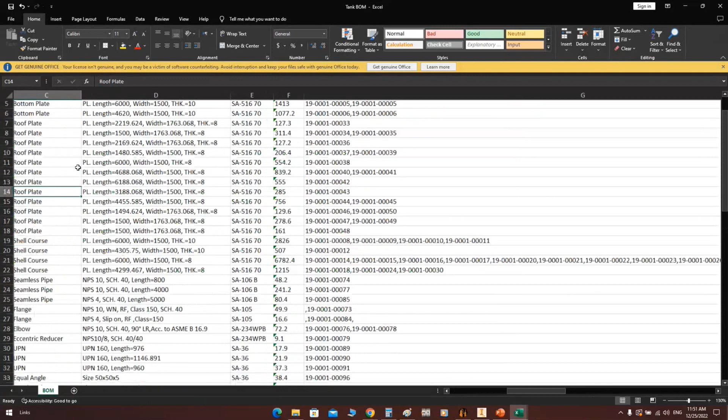Okay. Now let's say that we are following your sequence only. Can you go to the left side so we can see the left of the sheet? Now if we are following the SEG item mark numbers, in revision A of the drawings we have cut the roof plates, which are item numbers 6, 7, 8, 9, 10. Now I have a revision in my bottom plate, part number 5. It is split into two parts, so if you give numbers 5 and 6, and the roof plate numbers are disturbed, I will have problems in my drawings and the parts that are already cut. So for us, we cannot change the part mark numbers.

I completely understand what you are talking about, and I am trying to clarify why we didn't go that way, which is keeping each change for the element stored in history. I completely understand, but right now, to do something like that from SEG itself, we may need a big plan from our team to discuss it and how we can do it.

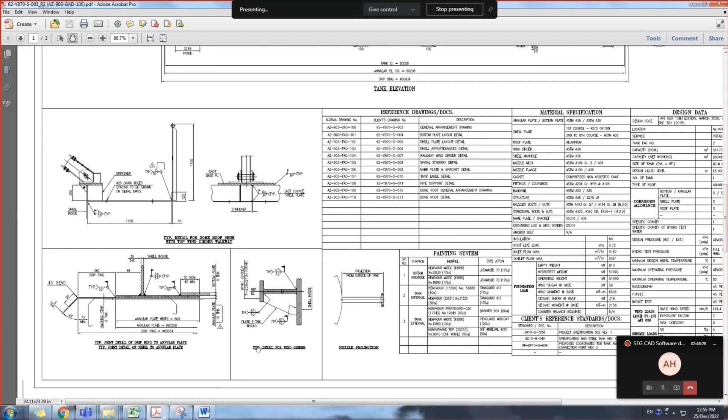I cannot hear your voice. Okay. No, I was not speaking because there was something at the back.

Okay, now you can see there will be a wind girder, 1 or 2 depending on the tank height. A plate fabricated wind girder, almost 250 by 210. Then we will have shoe plates, almost 500 by 500 plate, width 500, length 500. This is called a shoe plate, on which the aluminum dome roof shoes will sit. And a typical stiffener. And then see the plan view. I was asking you about this rectangular sump.

Here, this type of dome roof is not included in SEG. This type with segments from aluminum parts is not included. But our development team can develop something like that if we have enough information, like how we can arrange those plates, the parameters used to calculate the number and define the arrangement of those triangles on the dome roof. If we have that information, the SEG development team can, inshallah, develop something like that. The wind girder is available in SEG software.

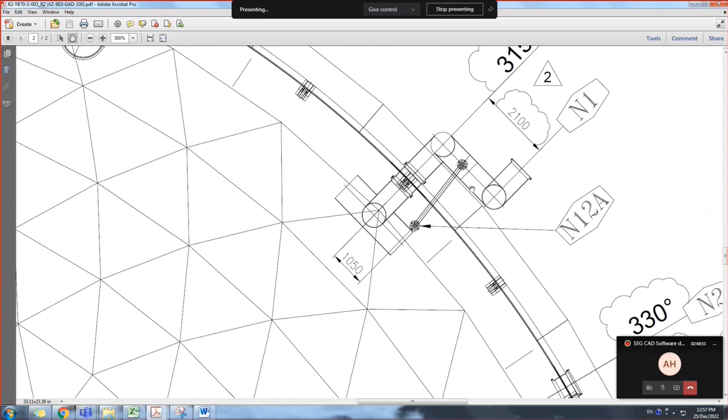For the rectangular opening for sump systems, it's not included. The external piping, like you mentioned on the previous drawing, is included. And the pipe supports are included. But if you have a configuration for the pipe supports not included in SEG, inshallah, our development team can provide it. Okay.

For the aluminium dome roof, actually, this is not our scope as a tank manufacturer. I think you will need to make it appear on the drawing at least. Just an appearance would be enough. We don't have to match exactly the ADR drawing. If you see this drawing, it's just a representation only, not exact figures. This is related to the aluminium dome roof. Now I was showing you this walkway.

Yes. For the walkway, part of it can be done right now, but the external part is not included in SEG yet. The dome roof stairs are not included in SEG. It's okay. It's okay.

There's one thing I want to ask. For example, now we are usually working in AutoCAD. With SEG, we develop the plan view and we don't see the aluminium dome roof. Now, from AutoCAD, can I import to Inventor and just copy the top view of the dome roof as a representation? Is this possible?

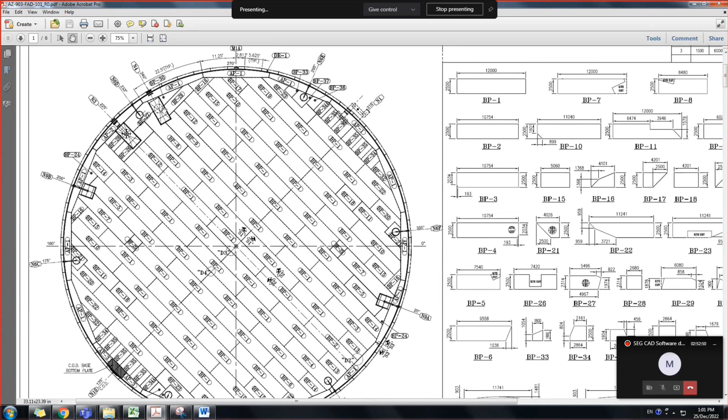Okay, I will show you. For example, just to show the bottom plate also. This is our typical bottom plate. I think you are having also the same, but due to the rectangular sump, we will have some disturbances in the layout. And mostly we go for annular with polygon type annular plates.

Give me a chance to tell you something here. If you zoom to plate number BP29 and BP16 in that area, yes, here in SEG we haven't an option to make plates like those, because you can merge rows, but all plates will get the same direction. You know what I mean? Okay, so this option is not available to make a plate. Yes. Here you're saying this BP29, BP16 will not be possible. Yes, because we have two rows, so the rows will come to the end.

Okay. So then in that case, can we do some manual changes in Inventor? Yes, you can do manual changes, but as you know, SEG will save time for you to make those things. If you try to make it by hand, it may take huge time. For example, for each of those plates, if you would like to draw it and assemble it manually, you may take 3 or 4 hours to generate a bottom plate like that in Autodesk Inventor. But in SEG you will generate it in minutes.

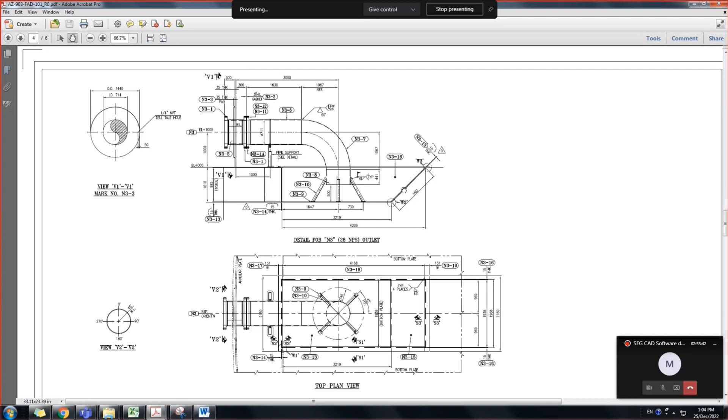Okay, got it. This is a typical sump drawing. It will be rectangular in the top view, but there is some kind of slope on one side. So I think in future you can add this in your modules. Yes, if we have a detailed sketch like that, inshallah, our development team can do it. Show you our walkway.

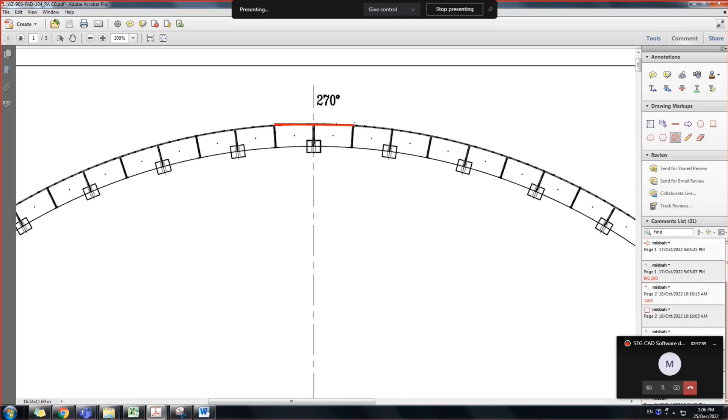Okay, this is a typical walkway segment. A typical walkway segment means, for example, this will be a typical walkway segment, and this will be repeated. Yes. And then we will have an opening in the walkway to allow access for the stair. And then this portion will be something different, something like this.

Great. Okay, so if we have a chance to get detailed drawings like that, inshallah we can proceed with that and include it in the SEG library. Okay, sure. We can do this activity in future. And then we have a typical handrail. I think it would be simple for you to adapt this in SEG. And then it's just the cage ladder fall protection. I think that's it. Do we have anything else? Okay.

Now, how do we start? If we want this software, what's the procedure? How can we start now? You would like to try it? Yeah, we would like to try. I think you already tried, sir, right? No, actually I haven't tried it. It's the pressure vessel team. They have tried, but from the tank perspective, we haven't tried it. So we want to try it instantly, and then very soon we want to proceed for the actual software.